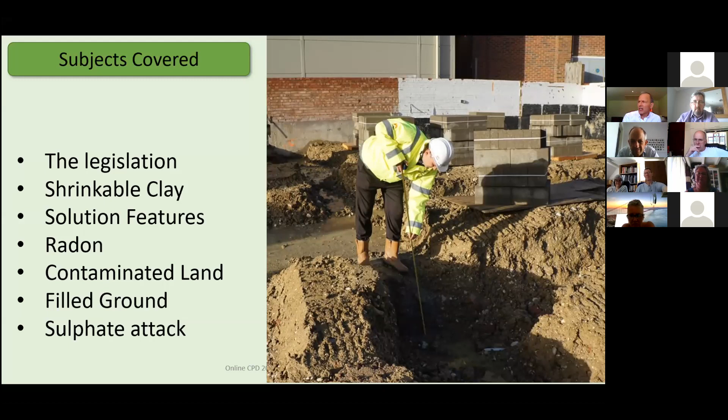I see my colleague David Eggleton there looking like he's inspecting a bomb crater rather than a foundation trench. Let's hope he doesn't approve it.

The building shall be constructed so that ground movement caused by swelling, shrinkage or freezing of the subsoil or landslip or subsidence, insofar as the risk can be reasonably foreseen, will not impair the stability of the building.

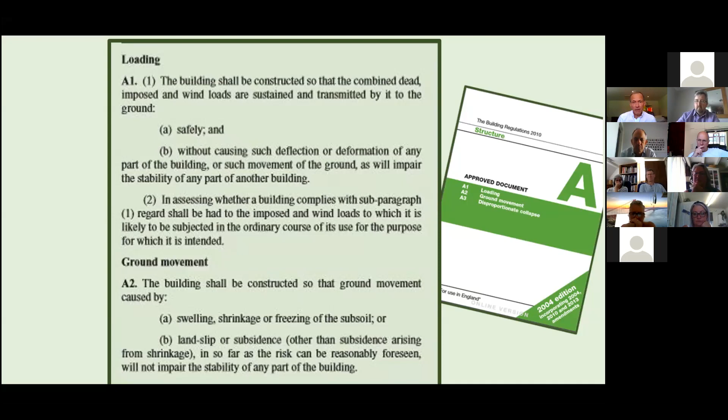Now remember, approved documents are not the building regulations. Along with British standards and other accredited publications, they just give guidance on ways in which compliance with the requirements can be achieved in common building situations. So that doesn't preclude other solutions from being adopted, but in law that would tend to suggest non-compliance with the regs without some sort of other evidence to back them up.

Also relevant to the topic today, requirement C1 and approved document C, particularly C1 1, which you see there, says that the ground to be covered by the building shall be reasonably free from any material that might damage the building or affect its stability, including vegetable matter, topsoil and pre-existing foundations.

And 2 there, reasonable precautions shall be taken to avoid danger to health and safety caused by contaminants on or in the ground covered or to be covered by the building, and any land associated with the building. So we're outside the footprint of the building now. So much of the regulations is only covering the building itself, but here we're actually covering the gardens and the whole plot. So something to note there.

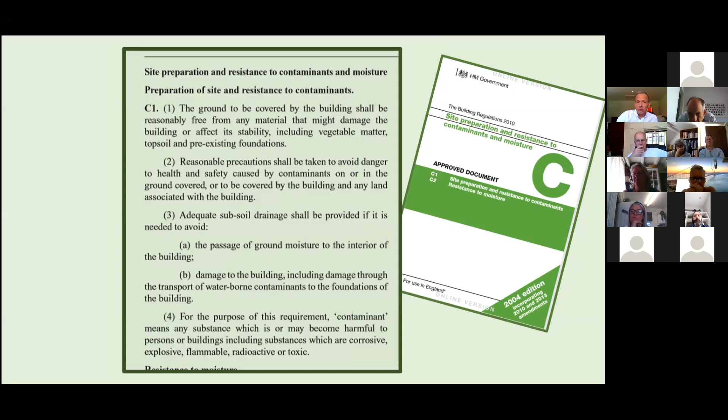Right, first of the problems. Let's get stuck into shrinkable clay, not literally, I hope. In Hertfordshire, we've got a great variety of natural subsoil types. Makes life interesting for building control surveyors. We find chalk, sand, gravel, different clays, silts, peat, what we sometimes call hoggin, which is a sort of mix of gravel and sand bound with a small amount of clay. And apart from the peat, which you wouldn't want to build on, most of them are quite well suited to being loaded by building foundations, depending on the bearing capacity.

But clay soils present unique problems. Clays and silts are cohesive. In other words, they comprise small particles bound together by electrostatic forces rather than friction. And they can be prone to volume change if the water content varies. I'm going to go into that more later.

Site test for clays, because we often find a building surveyor's clay is very different to a builder's clay. The test I would usually use is you can roll it into a ball, it will hold as a ball in your hand and will still retain its shape as a ball if you plunge it into a bucket of water. So if it will do that, then it's clay. If it breaks up into a lot of pieces, then it's probably not a clay that we would need to worry about. So what's the minimum depth we should accept for compliance in a clay soil?

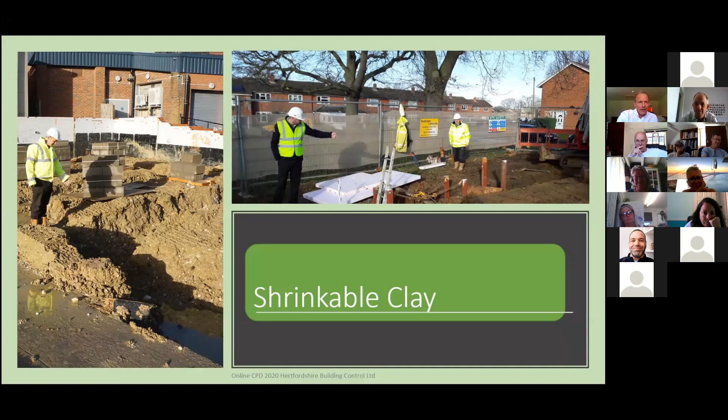Not necessarily. These are the minimum depths subject to there being adequate bearing capacity. And in clays, that depends on the particular soil's volume change potential, which is established by testing to find the plasticity index of the clay. And the plasticity index is an indicator of its tendency to shrink and expand with moisture content changes, and that's why it's relevant to minimum depth. More later on that subject as well.

So if in doubt, if we look at a soil and we can't tell without testing, then we would always assume it's high. So we would look for the minimum 1 metre depth in a clay soil. So those who shouted were right to an extent. But if it's a medium plasticity, as you can see, 0.9 metres is the minimum, and for low plasticity clay, 0.75. I'll tell you more about those categories, high, medium and low, later.

Off topic for a bit, but for non-cohesive soils, what a lot of people don't realise is that 450 millimetres is the theoretical minimum depth. So you don't necessarily have to have that metre in your head when you've got a nice rock chalk or a real firm gravel or hoggin or something like that, especially if you're extending a house and that's on a shallow foundation.

The other rule, of course, as some people know, where we're looking at extension foundations, we'd look for them to be to the same depth as the existing house if they're deeper, and that's a good practice just to avoid any risk of differential settlement. And that's created when soils at different levels have different bearing properties.

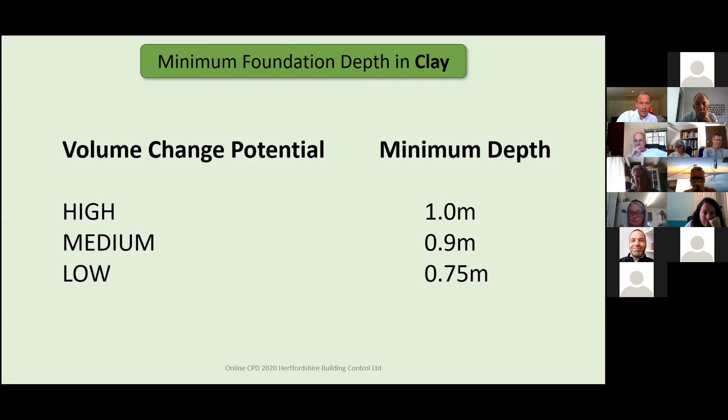So a bit of background, let's get into a bit of science about this, because I want to hopefully teach people something they don't know. There's a lot of clever people out there who know all this stuff already, and I'm teaching you to suck eggs.

When you analyse soil to determine its properties, you can do what's called a sieve test, and that determines its particle sizes. It analyses the distribution of particle sizes in a particular sample. We don't often see that carried out for small domestic work. Nobody can really be bothered to go to that sort of length to design a simple scheme. But occasionally we do, and we can base decisions on foundation design on these results.

So the graph there, just bear with me while I try and get a pointer up here, which will make it easier to describe. Hopefully you can see that bouncing around on the screen.

So first thing to say is there's a logarithmic scale there, ranging from 1,000 millimetres on the right to 1 micron on the left. And there are increments of thousandths, hundredths, tenths of millimetres, millimetres, tens of millimetres, hundreds of millimetres. Just to explain that, it's quite hard to get your head around a scale like that.

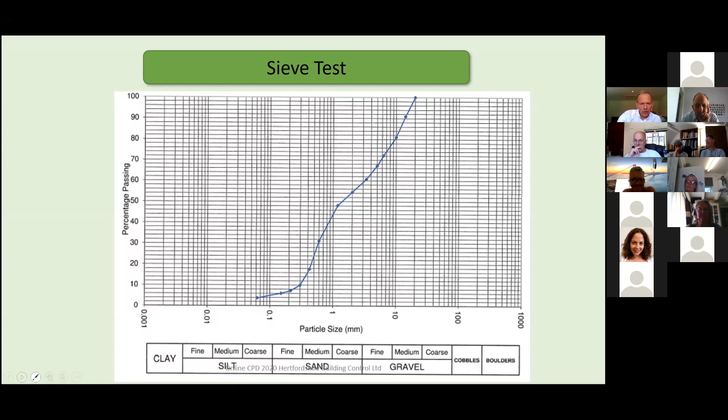Which is ironic, because this actual result came from where there'd been subsidence caused by an oak tree, and it turned out that this non-problem soil was overlying a highly shrinkable clay. So another sample told a different tale. But enough anecdotes. Let's move on and see the tabulated results of that test.

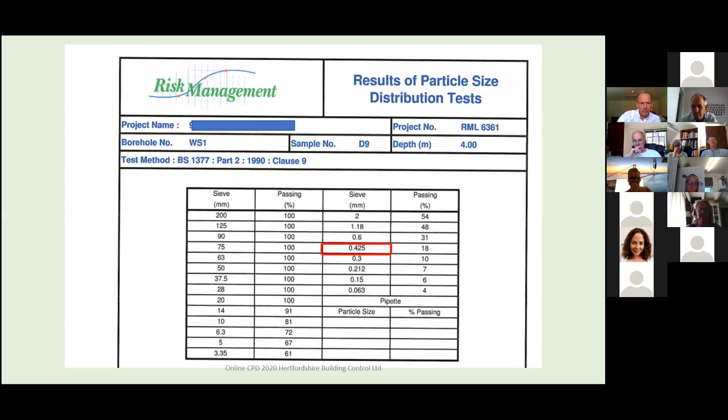So if you're not aware of it, here's a useful tool for establishing the prevailing ground conditions, getting an idea anyway that can be expected in an area. In other words, do I have to worry about trees? Am I going to have a problem with shrinkable clays? And this is the Geology of Britain viewer. It's available on the website of the British Geological Survey, which you can see up there on the screen, the web address there. And it shows the superficial or drift deposits of subsoil.

So I've just picked a map there, and that shows Welwyn Garden City. Right in the middle there is our base, Hertfordshire Building Control, just there. And you can see we're in a formation called Lowestoft Formation or Diamicton. Not a lot of people know what Diamicton is. I didn't till I looked it up a year or two ago. Apparently it's a mix of stones, sand, silt and clay.

There is one problem with using these maps in that geologists divide soils and rocks according to their age, not necessarily the type of material it is. So, whether it's sand, clay or rock. So you could take a soil maybe described as something like the Reading Beds, and depending on where that is in the country, it might vary between pure clay, where you've obviously got potential for problems, but in other parts of the country, it may be a sandy soil with no risk at all.

So that's where local authority building control's local knowledge can be handy. Our surveyors, they've got their turfs and they know what the ground's like, and they can help to interpret those maps. And also we can refer to records of countless thousands of inspections carried out over decades on foundations in the towns and cities we live in. And we can see if you're extending a house, what happened up the road and what ground they hit. So, we can be a useful resource there for you if you need it.

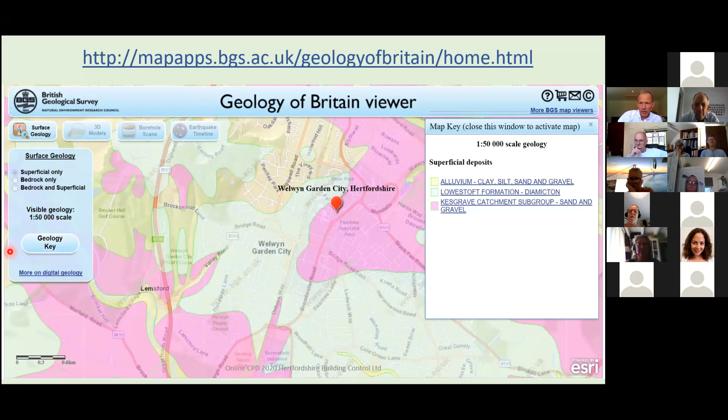Also available as a phone app. As isn't everything these days.

Right, on to more practical matters relating to foundations in clay. As I say, we've got lots of shrinkable clay subsoil in the southeast. So it's the main problem we probably face in building control. Sorry to teach you to suck eggs, but better mention that obviously if clay dries, it will shrink in volume. So if a foundation is bearing on the affected zone, then there is a risk of localized settlement or subsidence, which will cause potentially structural damage or cracking.

Conversely, if the moisture content increases, as would occur if a large tree was removed in proximity to a building, the tree's no longer taking up the moisture, the level then will return to equilibrium, i.e. increase, and then you've got a risk of increased volume, heave, creating an uplift pressure on any foundations that are bearing in that zone. So we have to take the risks seriously and guard against them at both the design stage and the inspection stages.

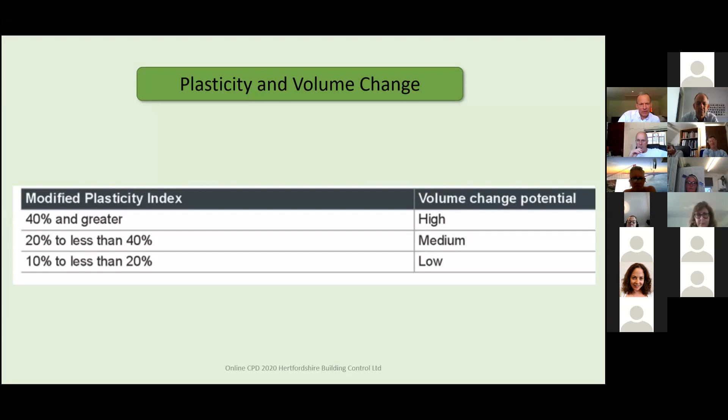Well, let's firstly start with what's plasticity index. Plastic, i.e. it's the point where a material is no longer fluid, and it's the range between it being a fluid and then being plastic and then becoming so crumbly it can no longer be moulded without breaking up. I didn't explain that very well. It went better at rehearsals, but hopefully you get the point. I mean, it's the range of moisture contents whereby you can mould a material without it being fluid or crumbling and breaking.

Interestingly, the lower plastic limit, the point at which it will crumble, is measured by the Atterberg test, which is a very strange test. I thought it was a spoof when somebody told me about it the first time. And it's actually rolling little sausages on a piece of glass, and you roll those out, measuring the thickness until they start crumbling. At that point they're no longer plastic, and you would then calculate the moisture content, and that would be the lower plastic limit. Anyway, enough digression. That's the plasticity index, but then we're talking about modified plasticity index, aren't we?

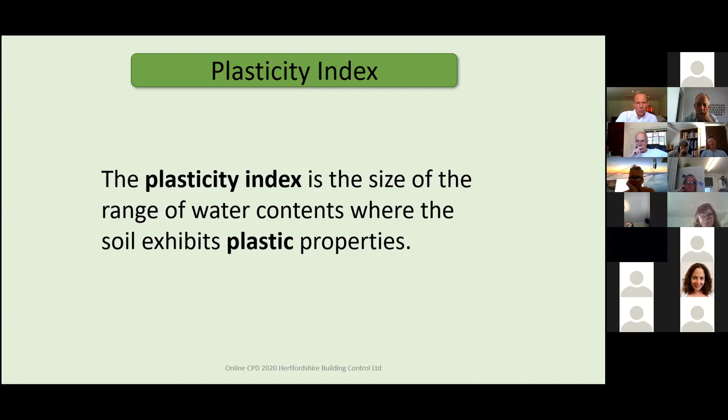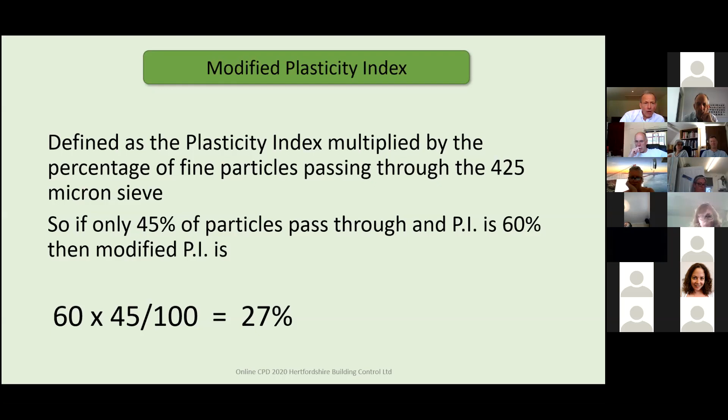So if only 45% of particles are passing through that 425 micron sieve, and we've got an original plasticity index of 60%, then the modified plasticity index is 60 times 45 divided by 100, so we've now only got 27%. So you'll understand how critical that is. That can make a big difference on a foundation design, putting a subsoil into a lower risk category, meaning foundations can be substantially shallower and saving cost and inconvenience. Hopefully that's clear. Modified plasticity index.

I'm being even-handed here. I'm not being too local authority orientated. There's the NHBC warranty, which gives some guidance on foundation depths in clay soils, as does LABC's warranties technical manual. And they're the industry design guides that we refer to to work out suitable foundation depths. And they're accessible to everybody. They're free online, and anybody can refer to them. And you can design to either. We would accept either as a basis for a design.

They've actually evolved on the basis of foundation failures, so they're as accurate as we can get them. Both very similar formats. As I say, they give recommended depths based on the modified plasticity index of the clay and the position and species of trees in proximity to the buildings. Both available for free online. I've already said that.

If we don't have the benefit of tests, then we have to make a judgment on volume change potential, and we would always err on the side of caution. So if in doubt, assume high shrink.

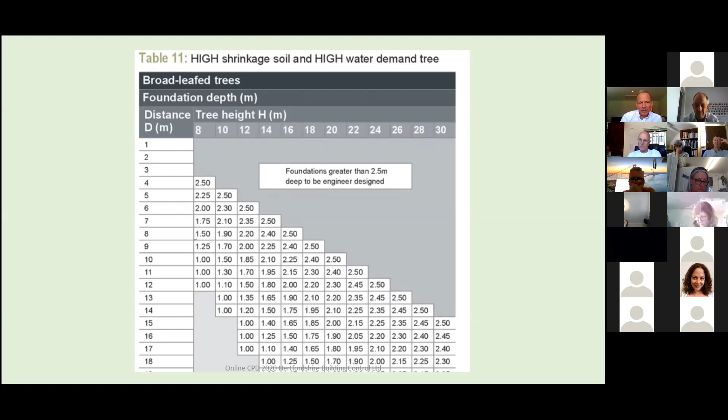But you may know that in the national design guidance there is an option to use a raft, but then you have to excavate out, I think, to about 50% of the design depth and replace with a granular material. So that's a very expensive solution that most people wouldn't be bothered with, but it can be done if you want to.

Heave precautions, because depth of dig is not the only consideration that we have to worry about, as any movement that occurs in the upper levels of the foundation could also cause a problem, especially if it's an uplift force. There may be sufficient friction between the sides and the swelling soil to lift the foundation, and this might occur when a large tree is removed close to the building.

Funny story, but I can remember somebody going down 1.5 meters because of filled ground or some other reason, and just had it in his head that you always need anti-heave linings. Of course you don't, unless it's for a risk of heave caused by tree proximity in clay.

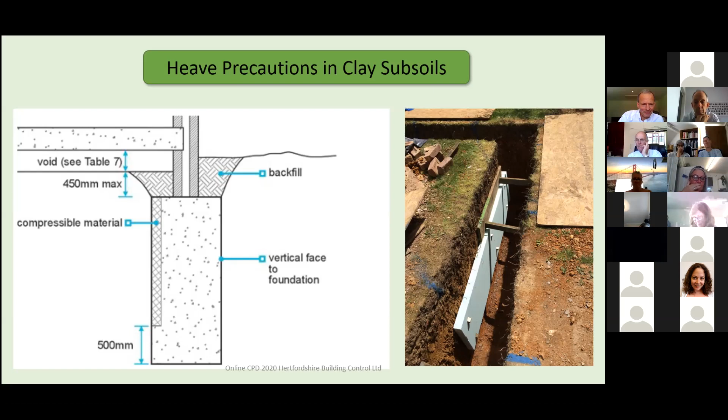Well, in this case, I would suggest, and it's my opinion, and I know it's not always shared by everybody around the country, but if when the house is built, the moisture content is unaffected by trees, i.e. it is in equilibrium at the time of construction, then if those trees grow, they will remove water from the subsoil. And if they are ever removed at any time in the future, the subsoil will only ever return to equilibrium. So I don't feel there's a risk of heave occurring in those circumstances, and personally wouldn't be looking for heave precautions. So if you ever get a situation like that, you can argue that one yourselves with the building control. And don't mention my name.

There you go, that's Claymaster, which we all recognise, pink, low density, expanded polystyrene. It's a compressible lining. It's not a void former. It compresses to effectively equate to a void, but it doesn't actually form a clear void. This is the most common material. It's very brittle. It's horrible to use, really, and it floats well, as lots of builders will know. It floats well in concrete if you don't nail it to the side of the trench very thoroughly.

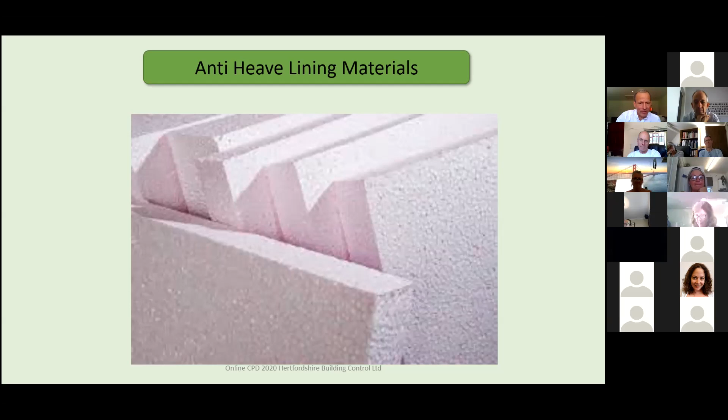And the warranty guide gives minimum dimensions for anti-heave precautions, and also for subfloor clearances, so that an adequate ventilation zone under the subfloor, which you might know is 150 millimeters, can be maintained even if heave occurs in the subsoil post-build under the floor.

So we see there that in a high volume change potential soil, we're looking for a void dimension against the side of the foundation of 35 millimeters. Now, if we're using a compressible material, you have to double that because it will compress, but it's not a void. So, in other words, you'd be looking at 35 times 2 equals 70 millimeters for high volume change potential clays. Conversely, medium, you're looking for a 25 mil effective void, then you would look for 50 mil if using a compressible Claymaster type material.

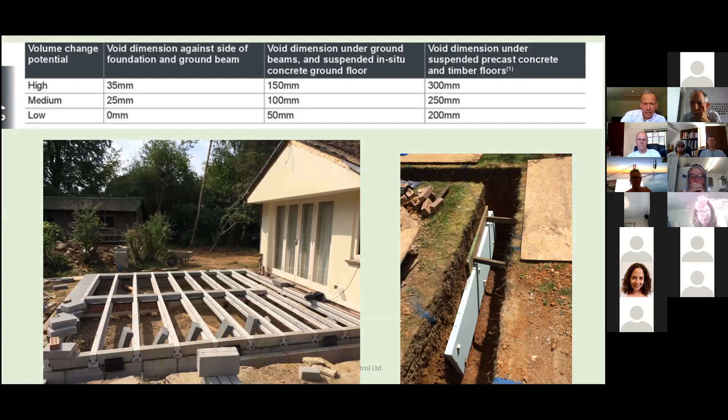Low shrink soils, as you see, you don't need any anti-heave. It's not seen as a risk. This quick diagram to show anti-heave on a pad and beam foundation. These are sometimes used in preference to a continuous strip. Save a bit on muck away and excavation where you need a deep foundation. Just dig bases and bridge between.

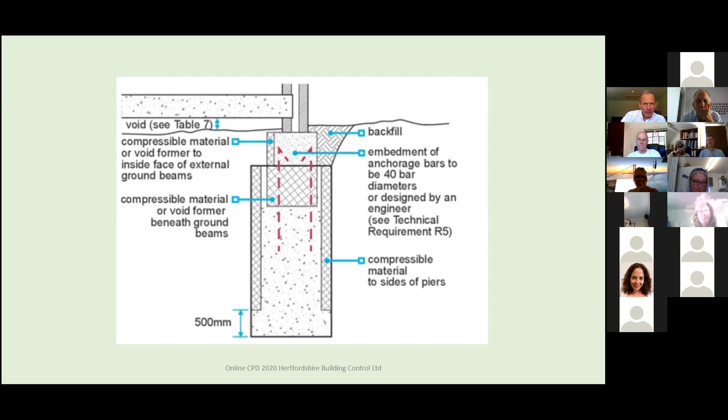So you'll note that in this case you put anti-heave lining on all sides within 500 millimeters of the base. You'll also note there's some very robust anchorage of the ground beam into the bases. And we've got void former also under the beam. As per that table in the previous slide, we're looking for 150 millimeters of void in high shrink soil under a ground beam. So you're not really going to use Claymaster there because you'd need 300 mil of the stuff. So you're better off using something like that. That one's, don't want to plug them, but that's the one I always see on site.

Cordek, expanded polystyrene again, a void former. So it's commonly used under ground beams in pile and beam foundations. It supports the weight of wet concrete, but will crush under load from below. So if there's any heave, it will crush up and you won't transmit load to the floor or ground beam or whatever it is.

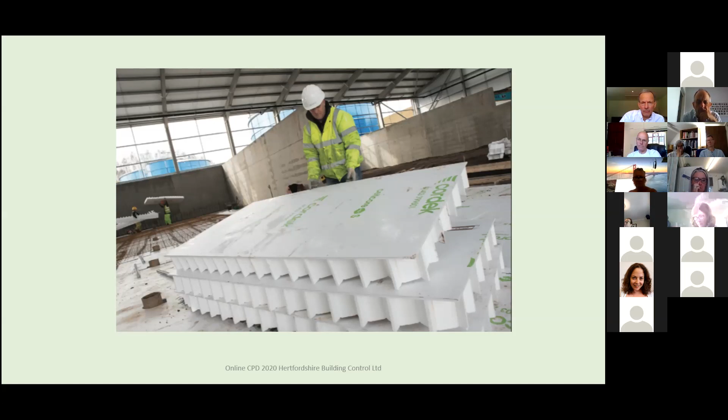Clayboard is another one rarely seen. Some of the old boys watching out there, I can see a few of you saying, yeah, I remember that stuff. I haven't seen it in years. It's still made apparently, and it's made with like a cardboard egg box between two impervious sheets. So it will do the same job as the Cordek. And then after the concrete is set, water is introduced into the void where the cardboard is, and that softens it, and then it will decompose away to leave a 100% void. So yeah, I don't think they'll be in business much longer unless we start seeing it on site.

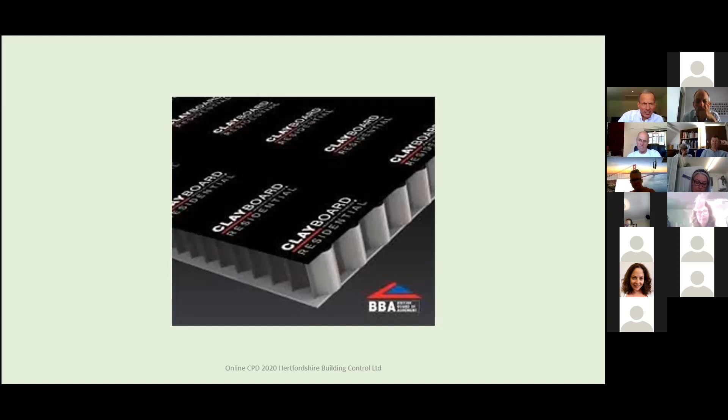Right, that's shrinkable clays. So have a slurp of tea. I'm going.

And we'll go on to the next topic. That was the biggest topic, so you might be glad to know that, but the others are a bit more short and sweet. This one is solution features and swallow holes, also called dissolution features and sinkholes.

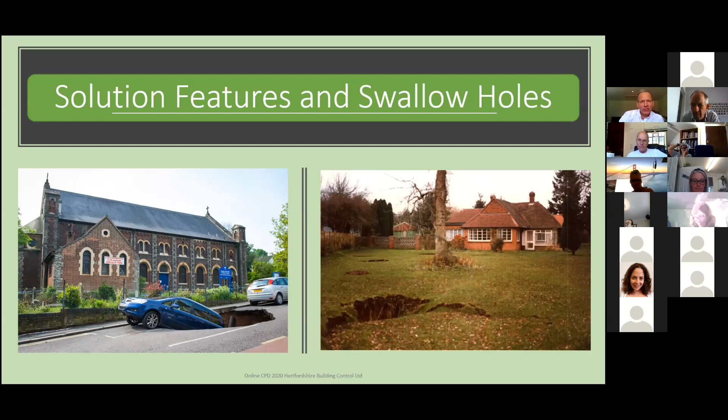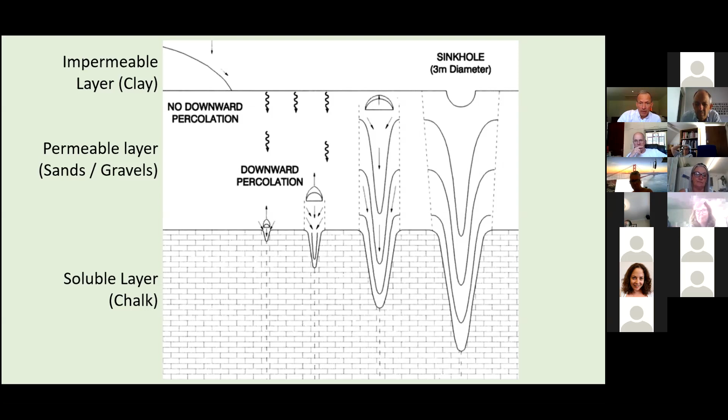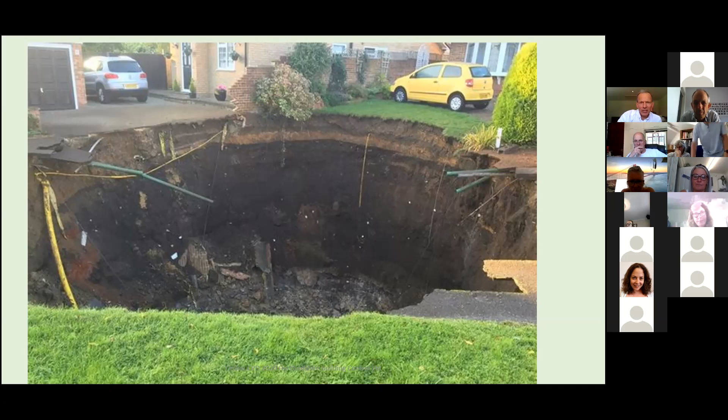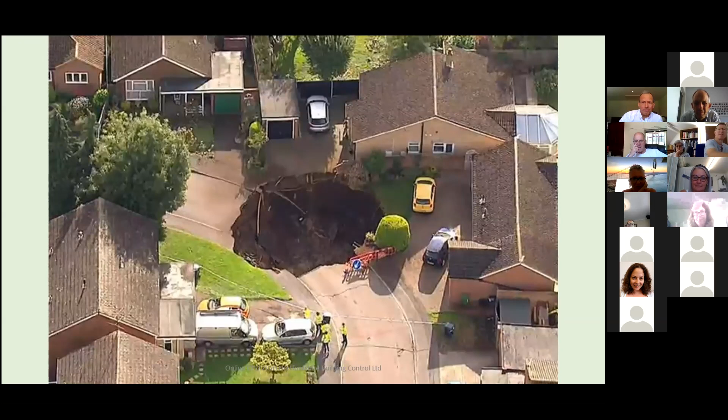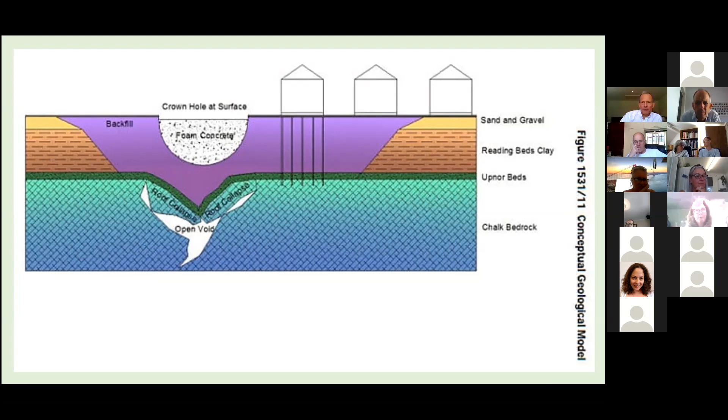I wonder if I can get my pointer going again. Let's have a look. No, let's try that again.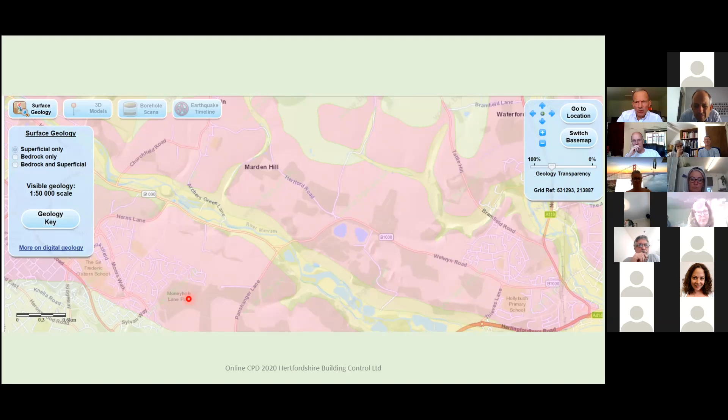And that's a simple map for the bedrock, as you'd expect. It's chalk, chalk, and more chalk, i.e. soluble limestone, where these things can occur. So what precautions can building control take? Well, we can insist on careful site investigation where development takes place in these known risk areas. Certainly we would recommend use of dynamic probing to test for subsurface soft zones and cavities in proximity to the proposed footprint of a building, if it's close to where features have occurred in the past.

We'd warn designers to watch out for the risk. And of course, when our people are on site checking the foundations, they know to look out for any signs of problems. There's sort of policies adopted over the years. In Welwyn Hatfield, they looked for, and we still look for, cruciform reinforced concrete foundations when you're extending properties in the risk zone of Panshanger, and that means you extend the corners out in both directions of the foundations, so that if anything does open up, there's every good chance that it will bridge over and not affect the building.

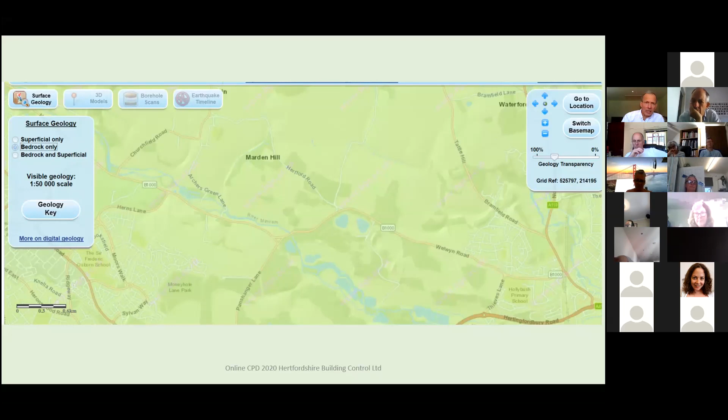This is a case I had to deal with as a dangerous structure a few years ago in Sele Farm area. It was caused by a swallow hole. The owner heard a bang in the night, he said, and he came outside in the morning to find this. So this just happened overnight. And yeah, there's no bricks missing. That is literally the corner of the foundation and footing has fallen off the building and dropped the best part of 300 millimetres into a swallow hole that opened up.

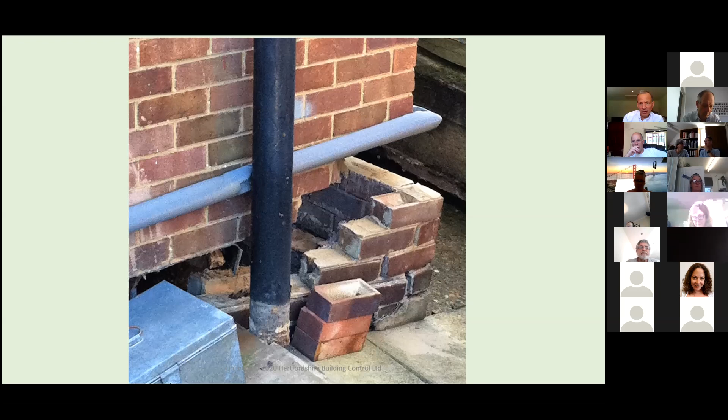It may be there was a drain adjacent. It may be that drain had been leaking, and that's what activated the hole. Very difficult to deal with. We had to evacuate the property, and eventually it was demolished. It was just a write-off. It couldn't be sorted out. So we look out for those, and the other thing I haven't mentioned is we would look for surface water drainage to go to mains for a change rather than an infiltration system like a soakaway, because that can exacerbate problems with solution features in these sort of ground conditions.

They also happen on our new turf, as some of you Dacorum agents watching might know. This one, February 2014, there it is, a big sinkhole opened up in a suburban road in Dacorum Borough Council. This was Oatridge Gardens in Hemel Hempstead, and it caused apparently 17 houses to be evacuated. Well, that was a big one. That was quite a reaction. There it is. I've managed to pinch some rather grainy images there for you to look at, but quite a startling result there.

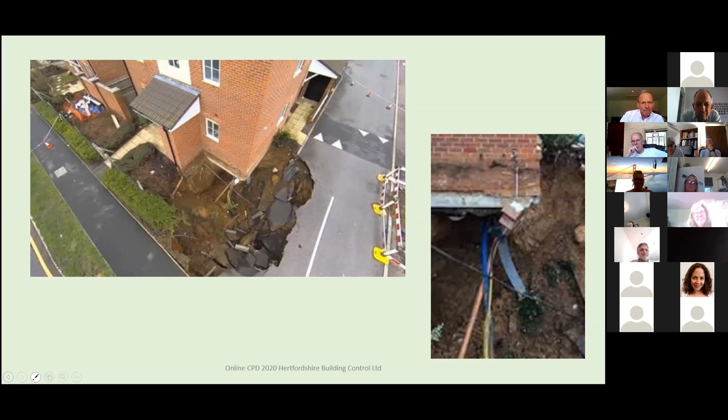I look at the picture on the right, which is a terrible picture, but I don't know if anybody else has got a guess at what the foundation type is, because it looks like a ground beam, but I can't see a pile there. And it's got a very clean side, so it also looks like a raft as well. So if anybody was involved in that or knew anything about it, I'd be very interested for an email to tell me what that foundation was, because the building seems to be faring pretty well considering it's hanging over a void. Anyway, that was solution features.

We're already on to our next problem subsoil condition, which is radon gas. Radon is a natural, colourless, odourless, radioactive gas. It's formed by the radioactive decay of small amounts of uranium that occur naturally in soil and rocks. And the gas can move upwards through cracks and fissures.

Shame on me. I'm presenting a presentation and I forgot to put my phone on silent. It's disgraceful. I will definitely give some money to charity.

Where was I? Yes, small uranium decays to form radon. Eventually it moves upwards through the fissures and cracks in the soil into the atmosphere. Most of it there will disperse harmlessly, but some will pass from the ground and collect in spaces under or within buildings. And in fact, for the average UK resident, apparently radon accounts for half of the annual radiation dose that's received by us, some of us.

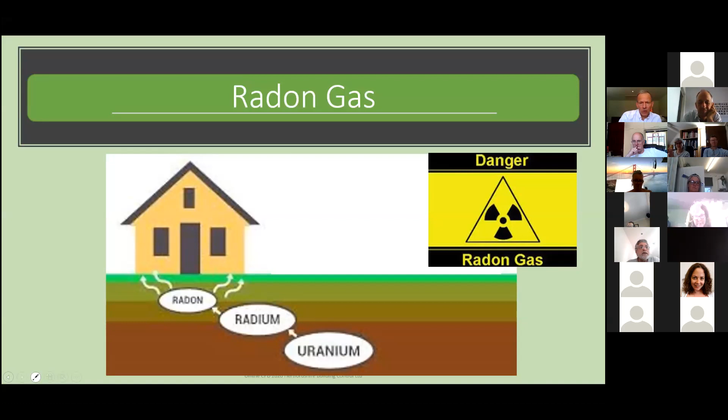And it's second to smoking, it's the second most common cause of lung cancer. So we do have to take it seriously. Until recently, we didn't have to take it too seriously because the levels on our patch, if you want to call it that, were so low as not to be anything to get concerned about in terms of precautions. And we knew that because we could refer to the free online map that you see there at ukradon.org.

So as an agent, you can always get the owner to pay for a risk report for their specific property that's available from ukradon.org. And I think it's only a few pounds to get that. And that will give you a more accurate estimate of the risk. If you want even more accuracy, you can send away, I think, £50. You can get a test kit, and they'll send you a couple of little black biscuit-sized detectors that you just expose in the property for a few weeks and send them back, and then they will give you an exact reading of whether there's any radon present. So if we've got no better guide to go on, then we would always look for basic radon protection where the risk exceeds 3%. So in that orangey zone, that's why we're going to be looking for extra measures.

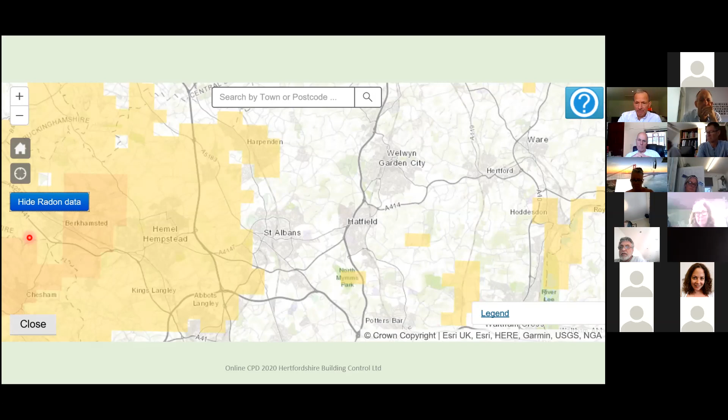We do a lot of partner work nationally in other parts of the country, and we have to watch out for our colleagues around the country letting us know that the issues do exist on their territories, so we can pick it up on our plan assessments. Northamptonshire is the closest that's particularly prevalent for radon problems. So if you're dealing with anything in Northamptonshire, check those maps. It's very quick and easy to do.

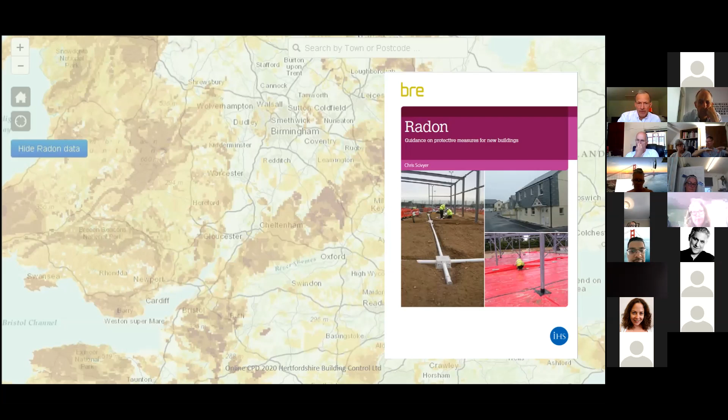I'll just go on to show you a few examples of basic radon protection. They're not great examples technically. I think definitely a scientist rather than an architect drew them up. Here we see a suspended concrete floor. Usually, of course, the floor level would be close to ground level. We've got to comply with Part M. So that's a nice detail that wouldn't always be practical. And obviously, with a lower floor level, you might have the problem of ventilation ducts to that subfloor having to pass through the membrane.

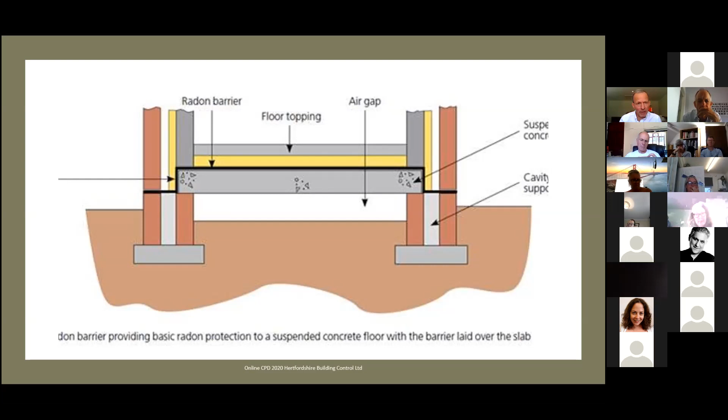Fortunately, products are available whereby you can seal around any periscopes penetrating the membrane in the cavity. Here's a barrier laid over a ground bearing slab. Simple there, very simple, doubling up as a damp-proof course.

No, it's not damp-proof. Obviously, we need a separate damp-proof course. A radon barrier wouldn't necessarily be appropriate for that function as well. Nearly slipped up there. With all these solutions, the sealing of joints and the laps around penetrations through the membranes is really critical. It needs to be gas tight, obviously, and that's usually where building control will find the problems.

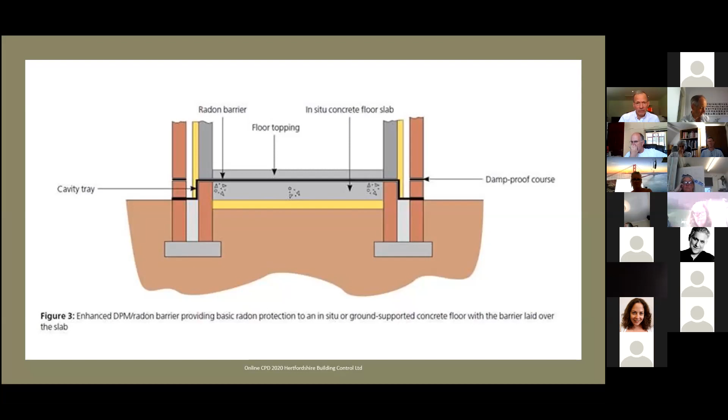Whether it's radon gas or any other gas membranes, it's the fine detail of the sealing that goes wrong, and that's why it's a key stage for us to be notified for inspecting this stage in the job, so that we can go and check that before it's covered over, when it's a contaminated site, of course.

Here's an option where the barrier is laid over the ground at low level. There it is, out to the perimeter of the building. Again, not the most practical detail. What a fiddle. You've got a sand blinding, then you've got a radon barrier, then you've got more sand blinding, then you've got some hardcore with some more sand blinding. You're going to get rid of a lot of sand on this job. Then you've got a DPM and insulation and slab.

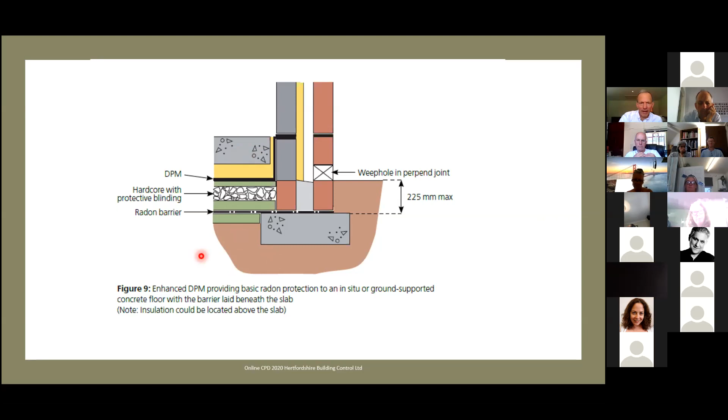So there's lots of ways of skinning the proverbial cat, and the manufacturers of these membranes will give some more practical guidance on how to install them. Of course, just briefly to mention that radon is not the only gas we need to worry about. As part of dealing with contaminated land, we also come across problems with methane and carbon dioxide.

And I don't know, like me, a while ago, you think, well, carbon dioxide, it's full of it, isn't it? Why do we have to worry so much about that? Well, if you watch the Apollo 13 film, you remember that they nearly scuppered their mission because the capsule was filling up with carbon dioxide. In fact, some of you may know, but only 0.04% of the atmosphere is made up of carbon dioxide. If it gets to a level of about 5%, then it's fatal. So it is a toxic gas potentially, which we have to worry about and protect the health of building occupants.

So guidance on those subjects, there's another BRE document, BR414, and all of these are available from online databases if you subscribe to them. And if you don't, then that's what Hertfordshire Building Control are here for, to help support you, and we've got access to all this guidance, and we can pass it on for specific projects. And that can be pre-submission, of course. You don't have to wait to make an application to talk to us.

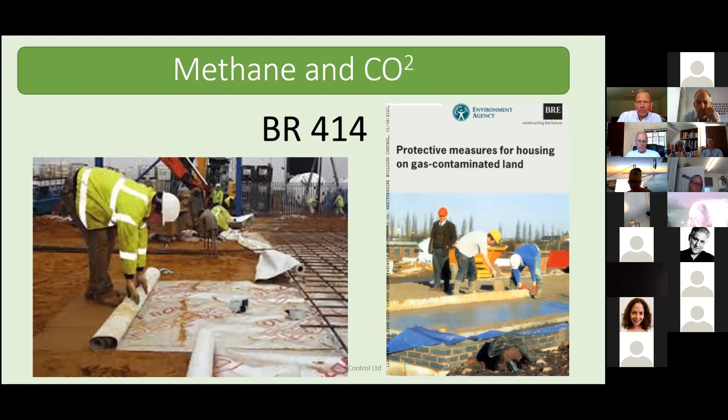Right, on now to talk a bit about contaminated land. It's a very big topic. It's a topic on its own, really, and that's why I'm trying to set up with a very good company to present in more detail on the subject. So today I'm going back to the point I made. This is need-to-know building control stuff rather than the finer science of the subject. So let's give you an idea of the considerations and procedures that we think we should take as part of assessing a scheme for compliance with requirement C1.

And the Building Regs 2010 is one of several pieces of legislation for dealing with contaminated land issues. We've also got Approved Document C. But before that comes into play, there's also Part 2A of the Environmental Protection Act. And our colleagues, the planning officers at the district councils, can generally consult with environmental health as part of processing a planning application. And they can attach planning conditions preventing work commencing before an assessment has been undertaken and any necessary measures agreed.

So in some cases where there are known and documented contamination risks, the issues might already have been covered in the planning process by the time it comes to submission to us in building control. But we do often receive applications for new housing where contamination has not been properly considered, and we have got a duty to apply the guidance in Approved Document C.

There it is, Approved Document C. And what are the steps that we need to take? Well, there they are in 4 phases. Phase 1, desk study and site survey. So that's where we look for a preliminary risk assessment to be carried out to obtain a good understanding of the site's history, its setting, and its potential to be affected by contamination. A bit of further reading there for anybody interested, that's BRE Digest 348, very old document, but still current. And there's another one that would cover the sort of site walkover and the desktop study.

Sorry, I got that wrong. The one there covers the walkover study. There's another digest that covers the desk study. So, slowly back into here and carry on.

So when we're checking a scheme for a sensitive building, by that I mean a residential building, a house or a school or a nursery or something like that, then we need to ensure that the applicant has at least undertaken that phase 1, and that will identify the need and scope for phase 2 being taken as well. That's sort of like a dependent one. And phase 2 being the more intrusive investigation.

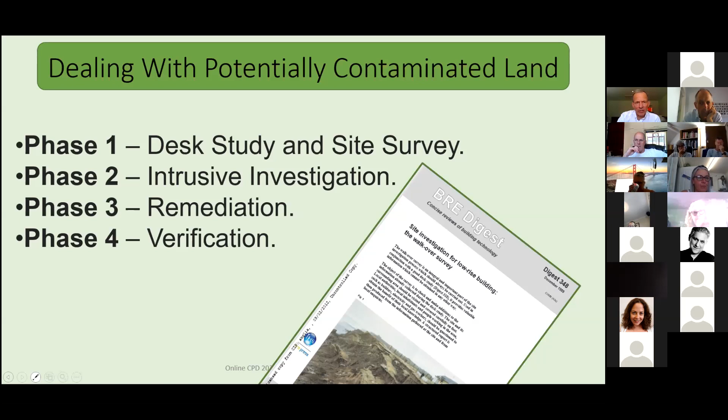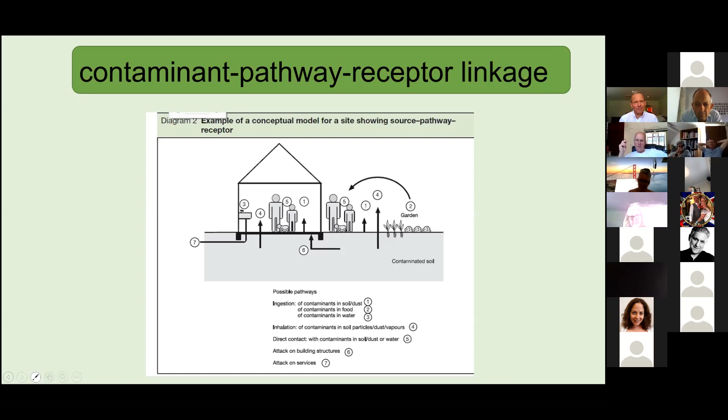It could be contamination of the water supply. In some cases, you've got contaminants that necessitate, not us, but the contractor using special barrier piping to prevent any contaminants entering the water supply. So we look to the consultant to propose how they're going to mitigate against these risks. In other words, they're looking to break the pollutant linkages. And he can do that by various methods.

Treatment, which might be biological treatment, chemical treatment, or some sort of physical technique. Containment, which might be encapsulation of the hazard, putting some sort of a barrier over it, adding layers to achieve separation from the receptors. Usually horizontal, but it might also be vertical containment to prevent migration of the contamination to other areas. Or it could be removal, and I think that's quite a common one to see.

In other words, just excavate and cart away the contaminated subsoil to a suitably registered landfill site, and then the problem's gone. Retest the soil at the end, and if it's clear it's all gone, then we're going to be happy, and replace it with something that's also been tested and found to be clean.

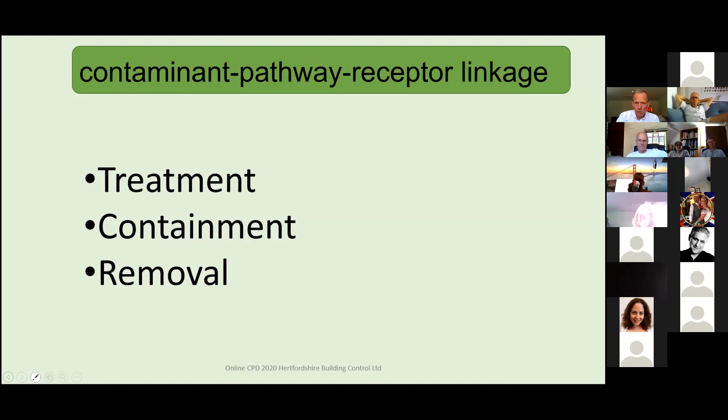Building control would always, at least where it's one of these sensitive land uses, ask for that phase 1 assessment. So we wouldn't let it go without that, and then that should justify whether or not you go on to the second phase and a more intrusive investigation. So I'll give you an example of a greenfield site for a dwelling a few years back that I dealt with. It was a beautiful field with horses grazing, but when they did the desktop survey, it revealed that the former land use was horticultural glass houses.

And that triggered some more intrusive testing, which showed that there was some real serious contamination caused by the long-term use of pesticides and fertilizers, along with a load of broken glass just underneath the surface topsoil. So even things like that and back garden development, as I say, can reveal contamination present. Things like buried refuse, leaking oil tanks, years of bonfires, Victorian properties.

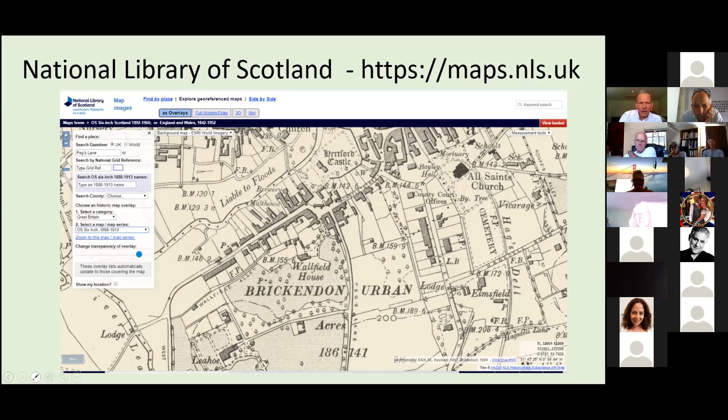Google Maps is another useful tool for looking at proposed sites for development. You know, I know a lot of our people sometimes will look at them to see what the tree presence is like, if we know it's a clay soil, and then also you might get an idea if trees have been recently removed. Just a bit of a case history here.

And it comprised really deep deposits of a very soft, light green, soapy material with an unusual odour. So work had to be stopped while this was analysed. I can say now that if I'd had access to those historical maps at the time, which I didn't, I might have expected some evidence of a past use.

Because if we look at the same site on the Ordnance Survey map from 1919, we can see there that long, narrow building turned out to be a rope works. And the material that we'd dug into was tallow, of all things. It was dumped tallow, i.e. sheep's fat, and that had been used in the production of rope. So fortunately, pretty harmless stuff, but it's certainly not the sort of thing you want to put a load from a foundation on.

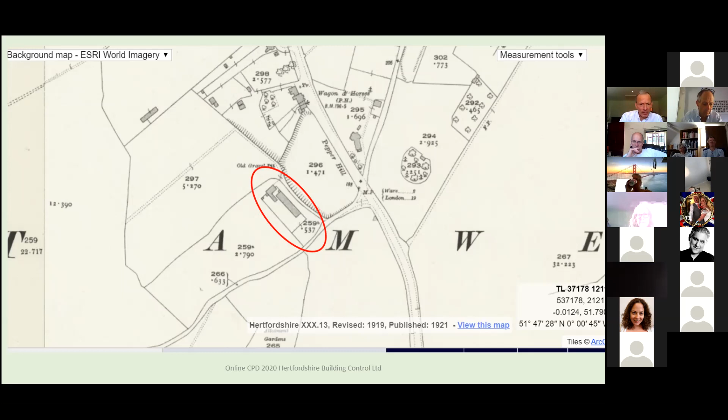But we're going to go on to quickly just cover filled ground. What's to say? It's an excavated soil that loses the compaction that it's got in its natural state. In other words, when it's excavated, it bulks up. Some soils bulk up more than others. So that means its bearing capacity is reduced. Sometimes it's made worse by other deposits that are mixed in. It may contain organic deposits that are slowly biodegrading, may contain contaminants that are harmful to health or could potentially damage the building.

How do you spot it? Sometimes it's very difficult. Our people look for colour changes in the sides and bottom of the trench. When you see a contrasting band of colour in the bottom or sides, that always tends to suggest there could be some unnatural geology there. And then we might ask the builders to break into a sample of the soil to look for unnatural inclusions such as bits of brick and tile or burnt material. As soon as you're seeing stuff like that, you know it can't be natural soil and that it's probably worth digging a bit deeper.

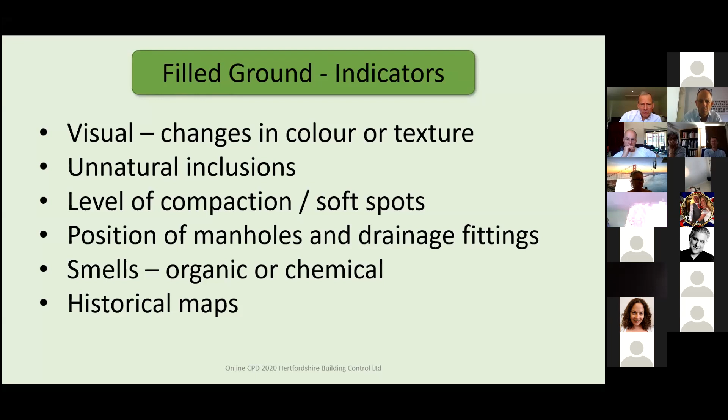And of course we've got natural wells, which also sometimes we have to get filled and bridged. Filling natural wells, always use something like a reject stone, something that's not going to clog up the aquifer at a lower level or contaminate the aquifer. Finally, the way we would spot fill ground, as I said earlier, look at the historical maps, look for those pits and ponds and quarries where fill ground might be present.

So if you don't have access to these maps, which most people don't actually, because they're a bit tight with releasing the access, we do, and any of our customers can give us a call and we'll happily check the maps and let you know if there's a public sewer on the land that you're going to develop. And that, again, in advance of submitting an application.

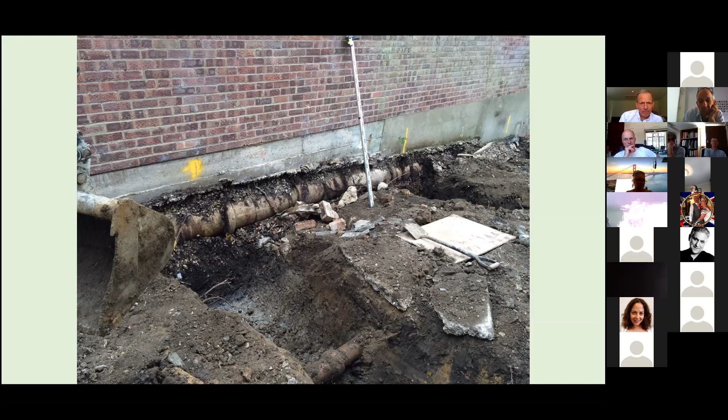Now, due to the risk of localised soft spots, in case they missed anything with the weights, we look in this particular area for precautionary reinforcement to the foundations on extensions. So just a simple, relatively light cage that's then dowelled into the existing foundation before concreting. For further details, talk to your building control surveyor or give us a call and we can talk you through that if you ever get work in that area.

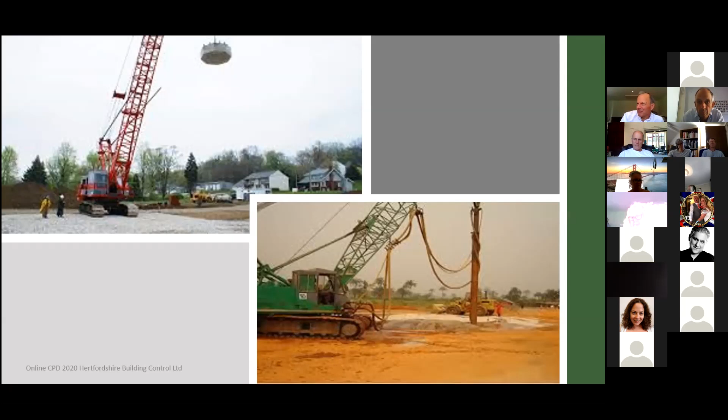Occasionally we find that some types of untreated fill ground can be built on, lightweight development, single story. If the ground is inert, reasonably well consolidated, so it's quite old fill, then maybe it can be founded on, bearing in mind it's probably got a very low bearing capacity, so you're going to need to spread the load. You might do that with a designed raft foundation, because that will spread the building load over the footprint of the building rather than just over a strip foundation. But as I say, that's only where you've got inert fill that's reasonably consistent.

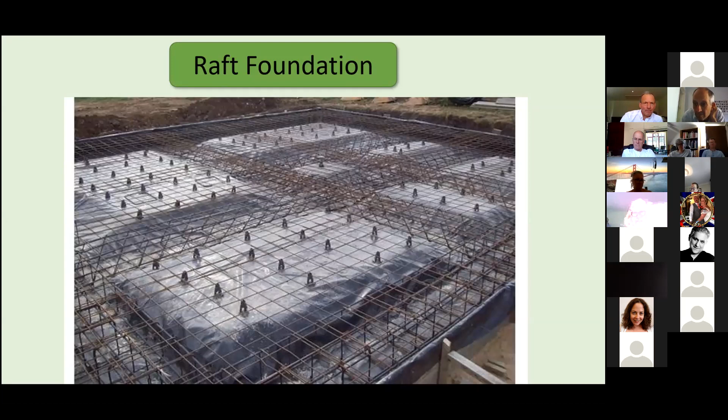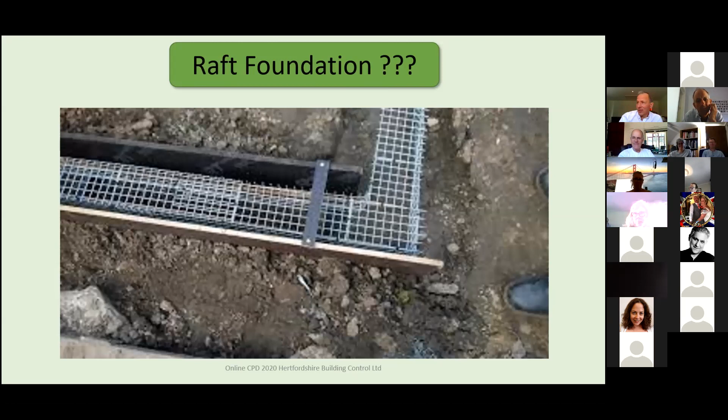Finally, we're on a roll towards the conclusion now. And after me droning on all this time, you'll probably breathe a sigh of relief at that.

I thought I'd also briefly mention the issue of sulphate attack. That occurs when sulphate solutions, and they can be derived either from the aggregate in the concrete or from external sources such as groundwater, react with the calcium aluminate hydrates present in hardened cement to form a substance known as ettringite. Ettringite occupies twice the original volume of the material. So as you can imagine, that expansive force can inflict serious damage on concrete, leading to weakening and sometimes failure of the affected structure. Now, this is different to chloride attack.

Chloride attack usually affects the reinforcing steel and causes it to corrode badly, and then the concrete will spall from the corroding steel. And chlorides are usually introduced by contaminated aggregate, in other words, salts in the aggregate. But we don't get that problem very much, so I'm not really including it. So most soil investigation reports will include a test for sulphates being present. It doesn't prove to be a big problem in this county, and in my experience, it's quite rare to see a sulphate problem raised on a soil report.

But it is encountered more in areas with London clay, and also in areas where there's the gault clay. So maybe that's Bedfordshire and Cambridgeshire, where they've got a lot of the gault clay. They can have more problems with sulphates and have to take precautions. It's always in a clay soil. You don't get sulphate problems in gravels and things like that. And even then, it's usually only what you'd call a homogeneous brown clay. So in a lot of Hertfordshire, it's the mixed up chalky boulder clays that we find. You don't get sulphates in that sort of clay.

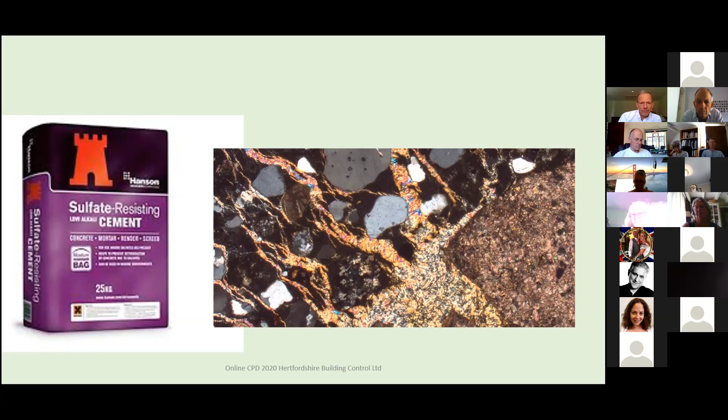So that is the end of our whistle-stop tour of problematic ground conditions. I hope you enjoyed it, and even if some of it was already known to you, I hope you gleaned at least some useful knowledge from it, so that it was worth your time.